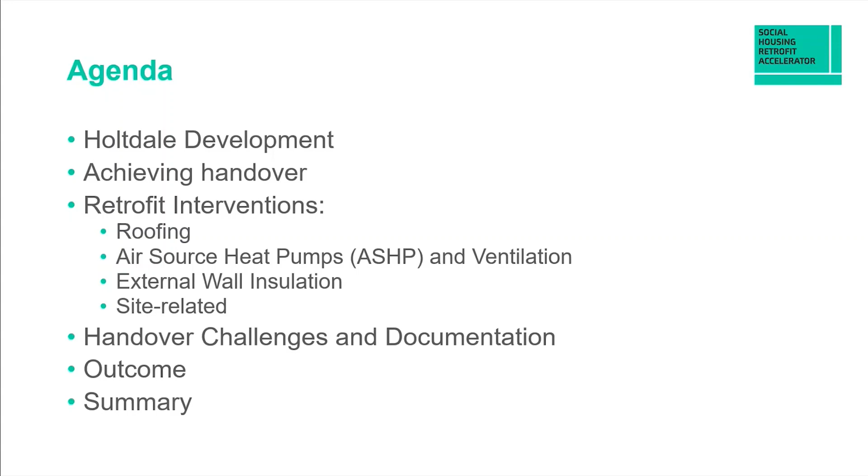As mentioned, the Wimpey no fines properties we were working on were built around 1975. There was a mixture of houses and flats, with major fuel poverty issues in this particular area of the city. In total there were 190 flats across 34 blocks that were highlighted to us, and a mixture of leaseholders and tenants.

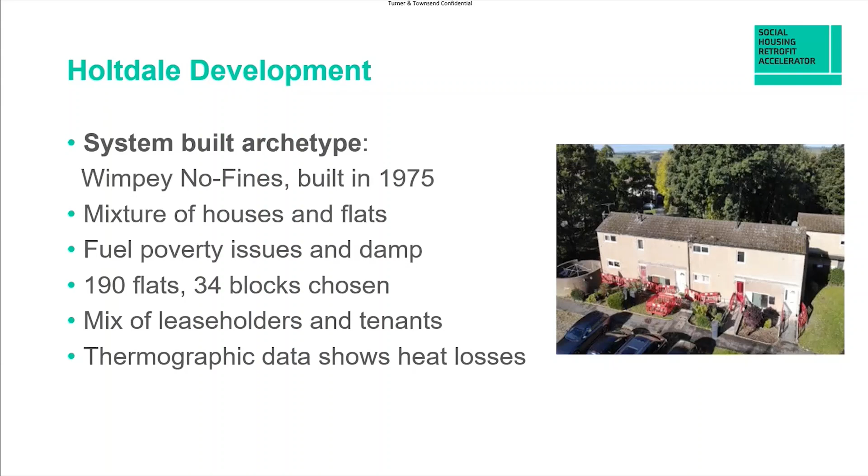Thermographic data shows major heat loss in these properties, backed up with EPC data, a plethora of different repairs carried out over time on the actual fabric of the building, and major issues with roofing. So it really was a good example of an estate we could target for this type of project going forward.

The roof in detail to start off with, as I've explained in other presentations, was a major headache for us. Straight off the bat, when we got to site, we realised there was a need to change the design on the roof. We were down for a traditional roof with concrete interlocking tiles.

But in order to achieve the difficult PAS 2035 retrofit standard mandated that same year we took on this project, we realised quickly we had to upgrade to a warm roof deck. Significant cost to that, around the region of 1.3 million on top - quite a large chunk of money to absorb before the project had even got started.

And then the air source heat pumps themselves, which originally were down for a Vaillant system, which I believe is a German system. Again supply chain issues, semiconductor issues in China meant the supplier couldn't keep up with the demand we needed for every single dwelling, and therefore we had to change air source heat pumps again early on in the project.

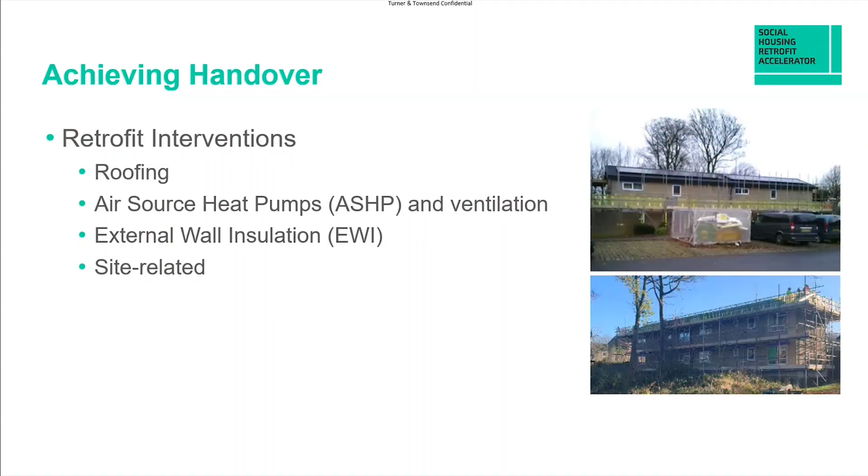So there were issues around getting the materials up to the properties themselves, constraints with parking, and little issues that could cause major headaches, such as your refuse and bin days, which were kind of overlooked at the time. But it were all new to us, so we'll learn as we go.

As part of the handover process, we get the Trustback guarantees on all the materials that we used.

The snagging was a difficult area for the contractor and subcontractors, because it was new to them as it was to us. And as you're probably all experiencing, the labour shortages and skill sets were difficult to source, and we're all vying for the same skilled labour, which ramps up the cost.

That can become a headache on any given contract, because you're looking at what could be described by principal contractors as force majeures, and all these additional headaches we had to consider. So keeping good relationships with a principal contractor is absolutely necessary, trying to understand their position and emphasize your own is challenging, but it's vitally important to get the project to be a success.

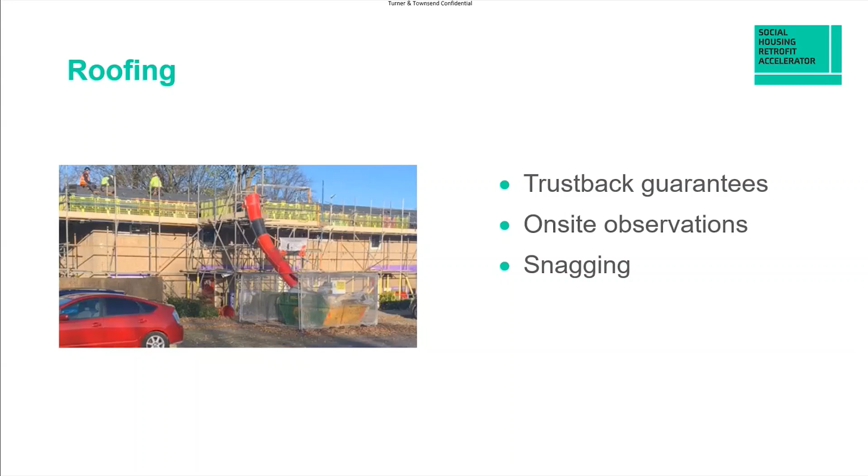And then the fire stopping, again we were learning as we were going. There were examples on this particular archetype of a cubbyhole for storage, and it wasn't viable to use those areas anymore, because by the time you put the external wall insulation into that void area, there was no space left. So again, headaches around tenant liaison and getting them to understand the difficult situation we were in. Decisions not taken lightly, so extra cupboard space was required internally for additional components we needed to make them compatible.

Again, ventilation was challenging. We did originally want the ventilation isolator to be out of arm's reach, but then you question, well, what's the point in the isolator? Problems resulted from that further down the line that we're experiencing now, maybe due to education of the tenants, that turning these things off can be a major problem.

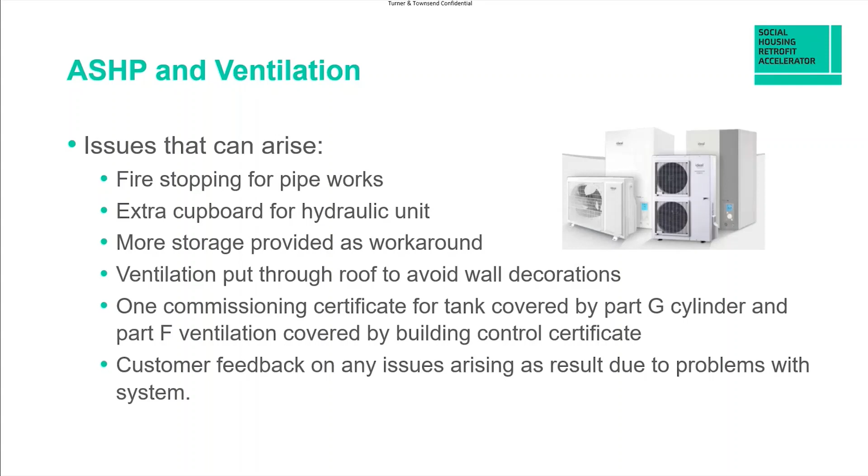There were also canopies on these properties, solid concrete canopies that ran the whole length of the building. They had to be taken off because of cold bridging, and to keep the external wall insulation continuous was important. So that was one other area that was overlooked, as there was a sense that they should have been kept, but that wasn't an option for us at the end.

Other things you need to be aware of: do walkovers of the site where you're going to be installing this project, have a look around and think where the potential problems could be. With this project we were rushed due to funding constraints, so we didn't have enough time to plan it as we would have liked, and the paths were considerably narrow - under 1.2 meters, which was the minimum highways said there could be.

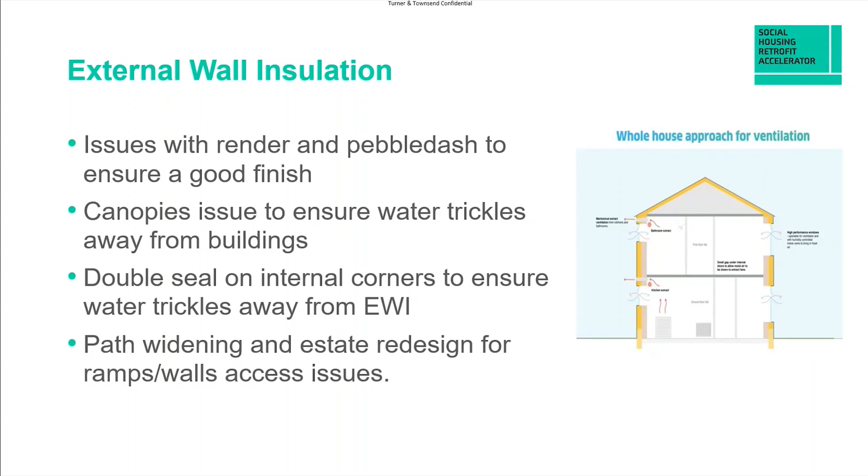Otherwise they'll just catch up with you later down the line. And then obviously double sealed internal corners to ensure the water trickles away from the EWI. As you've seen with any type of render, prolonged exposure to rainwater can cause staining on the render.

We designed that out. Another site related issue is access for final handovers - you need to be in and out of those properties about 30 times, which causes major tenant fatigue, particularly during the winter, which is most challenging. So be clear from the start with your tenants just how many times you're going to have to be in and out of that property to get it compliant and handed over correctly.

And the final checks for the EPC data are crucial. Troubleshooting issues with systems and tenants, as I've mentioned. Decoration payments are around £100 per property for the reveals on the new windows and doors. Again, redesign access to waste collection bins and stores, and the grass cutting schedule, landscaping, and little things like that can cause major complaints and headaches.

I'll just talk through some of the handover challenges, specifically what we have to deal with whilst we're actually carrying out the work, and also at the end of this project. There was a lot of tenant education for the new technologies, and as Darren's mentioned, there's a different way of working when you have these new technology measures in place.

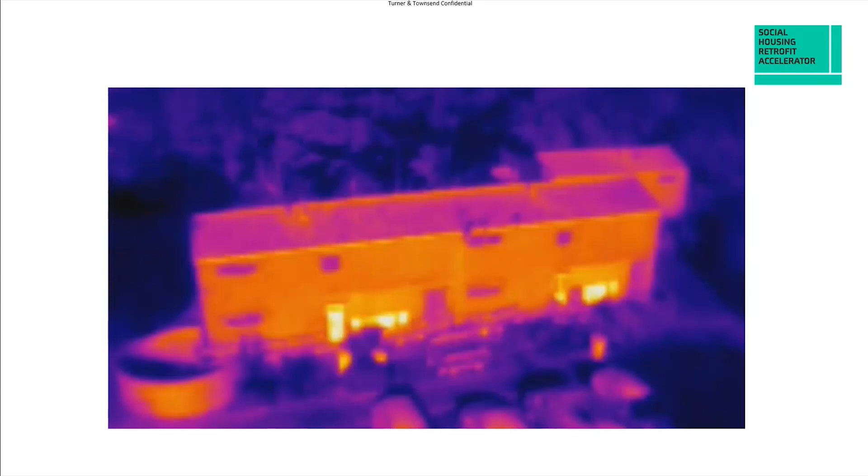Since then, we've got more challenging climate change targets going on, so in respect of that, it's always going to be EWI.

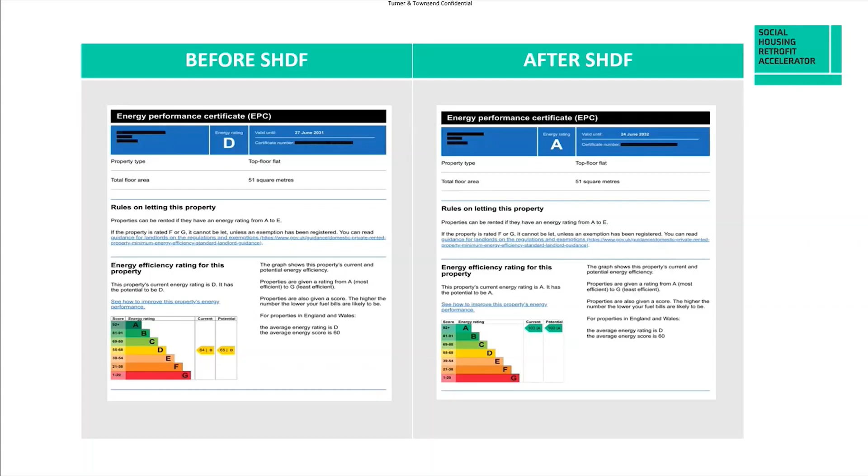Because of leaseholders, and because they had to go through a separate LAD2 funding, we had to fill out applications with those leaseholders, and they could only achieve a C because they couldn't have the air source heat pumps. We managed to get them windows and doors through the LAD2 funding by pooling money that comes through on other applications within the local authority. So we were perfectly placed to deal with all the leaseholders, and we didn't want to be held back by them — I know that's been a big problem in previous schemes across the country as a whole.

In terms of this, you can see that's the same building, and you can see the standard that's been achieved — a very high standard overall. The upper flats, accessed via a stairway, are the A standard properties, and the ground floors are B.

Overall, you can see what was on the left hand side, and now on the right hand side — they're more fuel efficient, they're better, they're achieving a better standard, and it's a case of having more properties if we can. You can see there the contrast between the two properties.

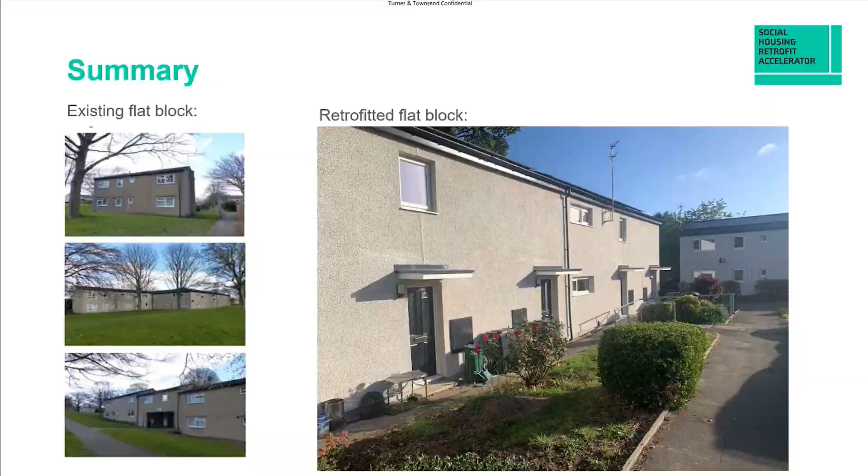You can see that one still needs the work, and we have around 3,000 Wimpey no-fines properties as a whole within Leeds across the city. We've just achieved a drop in the ocean, and it just requires more work and more funding. It cost us around £55,000 per property to upgrade to this level. I think that's probably changed, as Darren mentioned, in respect of the wider inflation and the force majeure the overall provider had to go through at the end of the project. But it illustrates what's been achieved, and it can relieve the issues of fuel poverty, if we want to put the money forward to be able to do that.